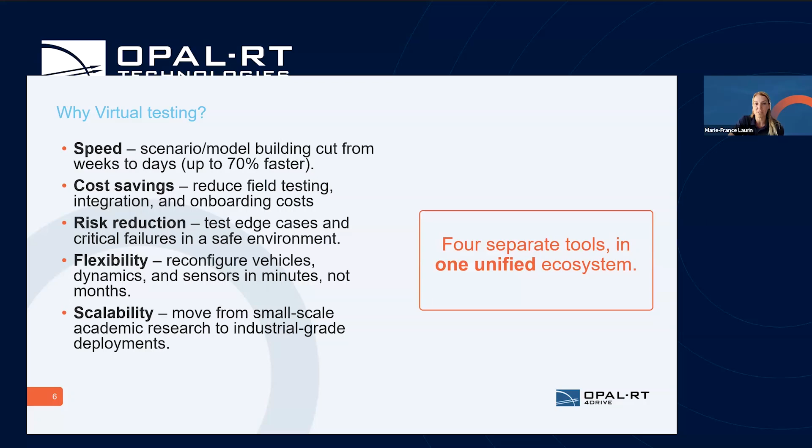4DV simulation is one unified ecosystem split into different tools that you can combine or select specific elements from. Just wanted to say, if you have any questions while we are presenting, please put the question in the Q&A. If we are able to answer them as we go, that would be great; if not, we'll keep them for the end and make sure to answer all your questions. So please do not hesitate, don't be shy—the best thing that happens is when we have conversation with you guys to make sure the presentation is relevant to what you're looking to accomplish.

The 4DV software suite is a combination of different tools, specialized in development and contextual sensor data. It defines your test environment for development of mobile robots, drones, autonomous vehicles, and AI. This is something very unique to 4DV simulation—the combination of all those different types of products—and the robotic angle of it is very important for us. What you do with the 4DV-SIM is simulate the sensor to generate the contextualized data that you'll need for your testing.

Then you facilitate the test and the reliability for the embedded system, lower cost for prototype, test and validation under close conditions of your use case. Especially if you think of defense, it's never really a testing environment that's easy to find. It's usually remote or really secluded area.

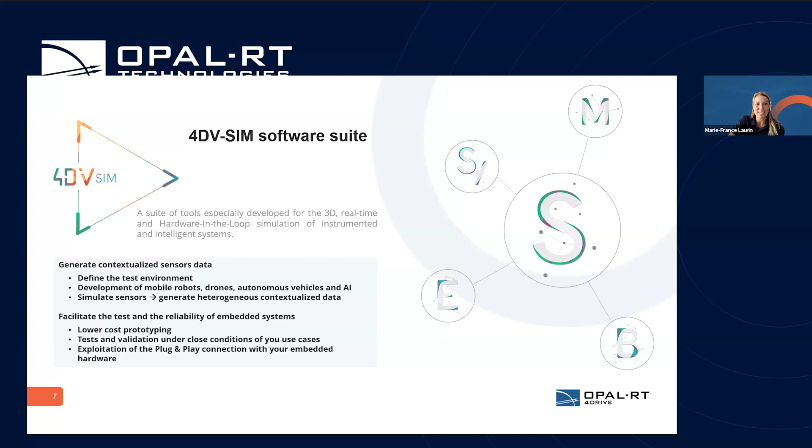So the real-time and hardware-in-the-loop 3D simulation testbed - what we do is define the context. So define your context, use the library 3D environment, pedestrian, vehicle, all the weather disturbance, the 3D objects that you would like to put into the simulation with your 3D environment, and then all the robots or the drones or the vehicle that you have.

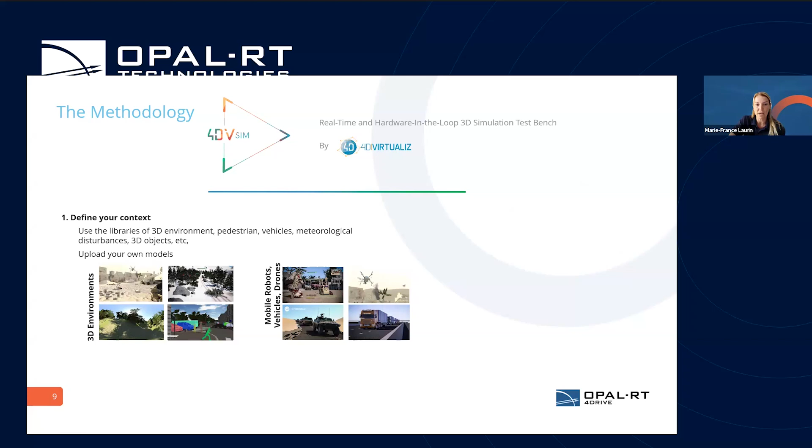Then you have the instrument with the same sensor, so generate or emulate from real sensor, the same mode of communication, so the communication protocol as with the real system. So the visual and physical sensors are added into the simulation. Then you have the interface with the tool, so you can do co-simulation or just simulation with the 4DV and analyze all the tools that you have.

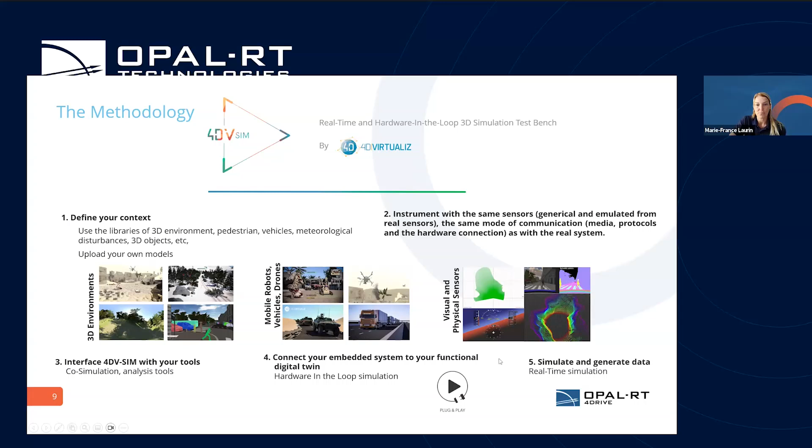So generate the functional simulation to quickly provide data in use cases which are difficult to access, dangerous. It's really something important when it comes down to the defense environment. You'll rarely have an environment where it's smooth road or perfect condition to have your autonomous vehicle running. That's why having the opportunity to create environments more similar to the situation that you'll have your mission, or that you have your mission command and your deployment done, is good to do with the simulation.

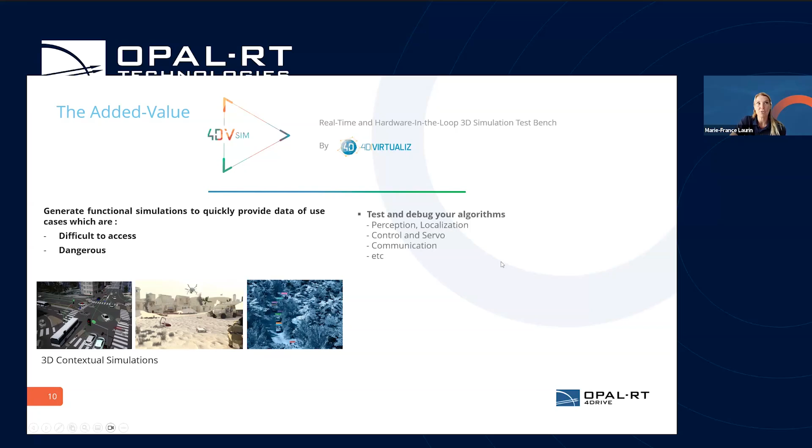And then test and debug your algorithm, all the perception, localization, control, communication protocol - what happens if some communication falls through because of the environment of the defense project.

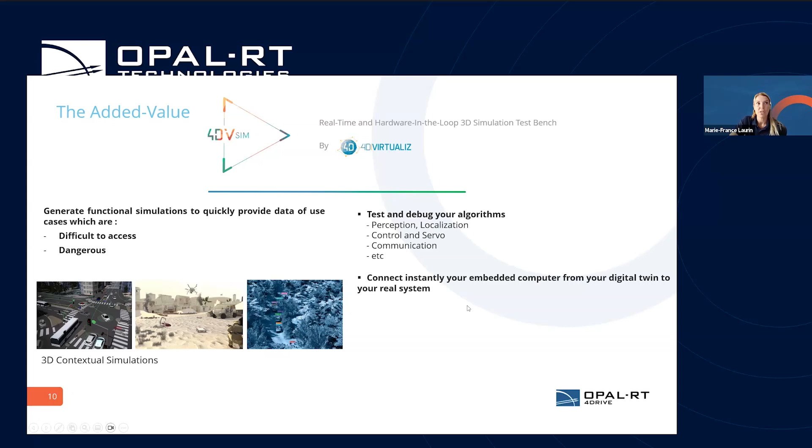Connect instantly your embedded computer from your digital twin to your real system. Improve the reliability of your algorithm with the automated tests that we can do, and then generate automatically a database and annotate images for the learning stage that you can use for your AI, and then develop, test and improve your user interface and the functional use of your control.

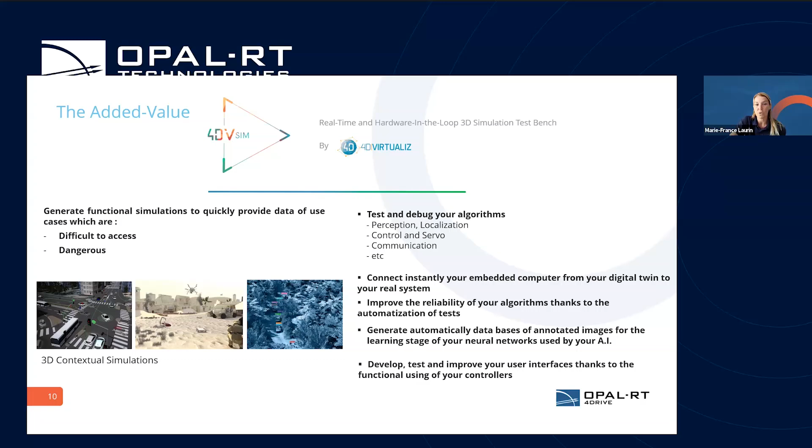It's also a good way with the simulation to make sure that the troops, or that the mission that you have, is well aware of how the vehicle is working, how it's interacting, and what to do in those situations.

So those are the different suites that we have into the 4DV-SIM software. I'll let Valentin go a little bit deeper into all of them, just to give you more information on all of those elements. Valentin?

Yes, perfect. Thank you, Marie-France. So as Marie-France explained, there's a whole process into creating a simulation. Now let's look at the different software components that compose this software suite, the suite of tools that is 4DV-SIM.

Let's start with the 4DV simulator there in the center. It is the piece of software that takes a simulation - let's call it a scenario - and the scenario contains all the sensor models, your systems, and the interfaces between the sensor data and your controllers in the loop. So that's what the simulator does - it runs the scenario and generates the data, communicates. But how do we create a scenario?

Well, we use one of the tools, the 4DV editor that you see, to create scenarios. So what is a scenario? It's a collection of different visual elements - 3D models of environments, of your own systems or of systems from our library, instrumented with the sensors placed around the vehicles as you'd like. One sensor, ten sensors, it will depend - it will affect the performance as well, but it's up to you to define those things using the editor.

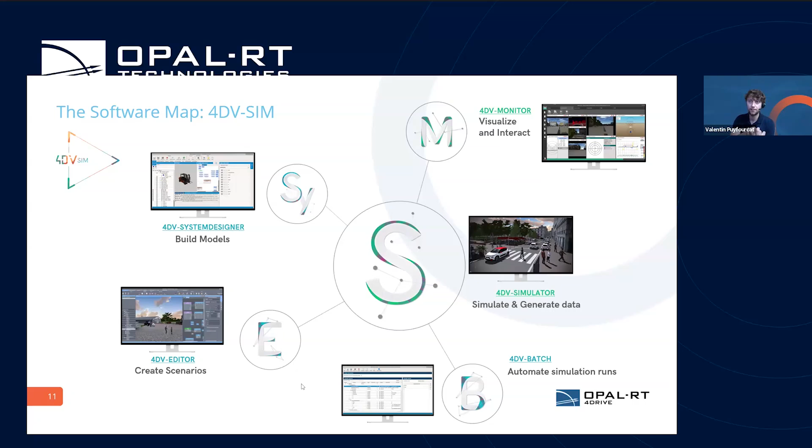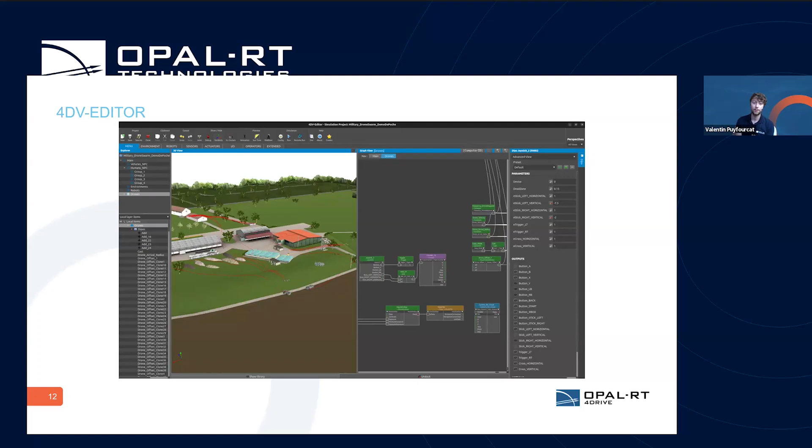I believe we have a couple more slides to give you an idea of what the GUI looks like, the graphical user interface. Here's the editor. It's a graphical user interface where we pick and choose from our library, either 4DV's library or your own custom library. On the left side, a 3D view of the elements to place them simply and quickly. On the right hand side, you have what we call the graph view, which is where we perform the different connections between, let's say, sensors and communication interfaces, or communication interfaces to your systems for information like speed and control commands. So this is just a quick overview.

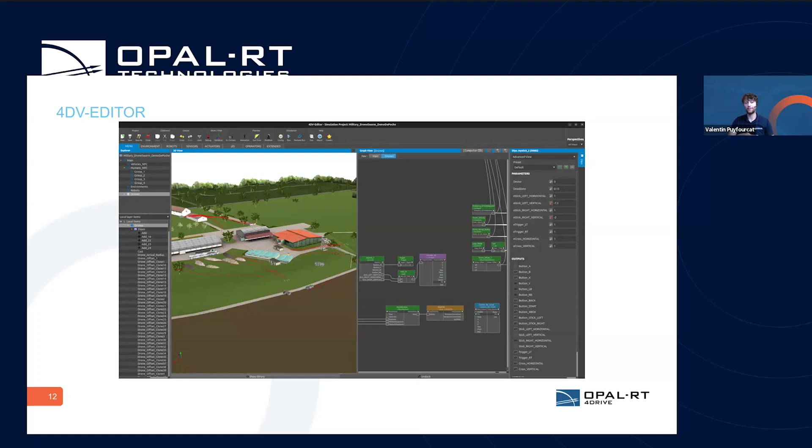Next slide, we have the 4DV System Designer. This slide was to show you how large of an environment we can introduce. This is about a 5 by 10 kilometer environment. It all depends on the number of vertices in your models, but we can simulate large environments like this to perform long-lasting missions going through different terrains, over mountains, etc.

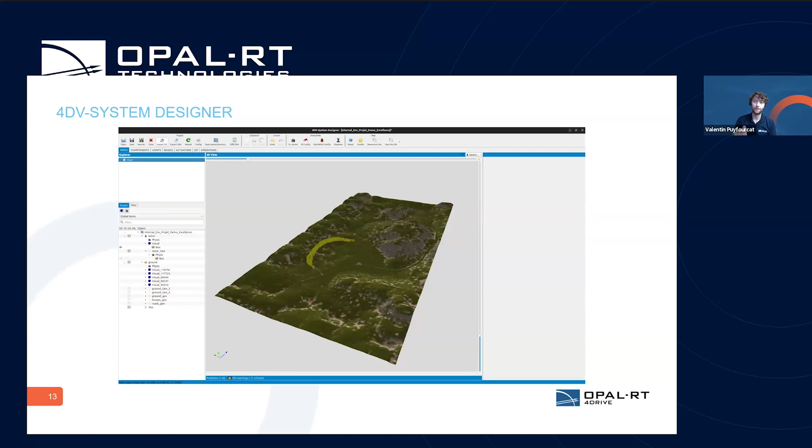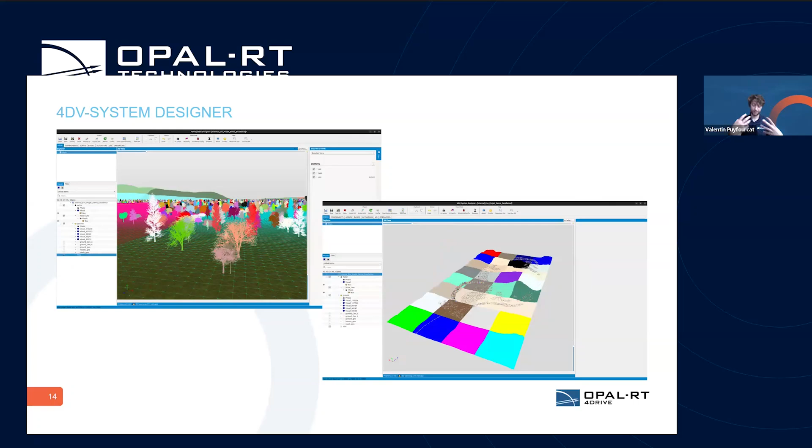If we go to the next slide, we get a closer look at the definition. Here we see more of the physics side of it, the mesh definition of the environment, the ground, and some of the trees populated in that environment. So 4DV System Designer is used to bring in these 3D models and give them their physical properties so that you get a realistic simulation.

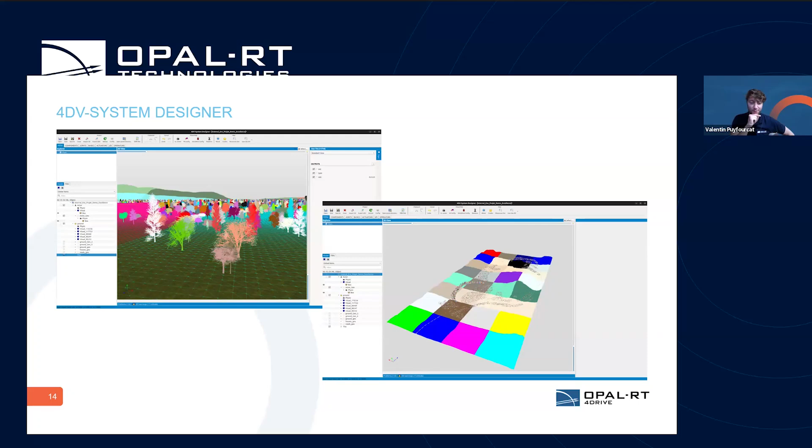I believe I've got one more slide on the 4DV Monitor to give you an idea of the different cameras, the different visual elements that exist to visualize the sensor data. We see some LiDAR point cloud, some cameras, and some elements for orientation of likely a drone on the top right corner. So all of these elements are part of the software suite.

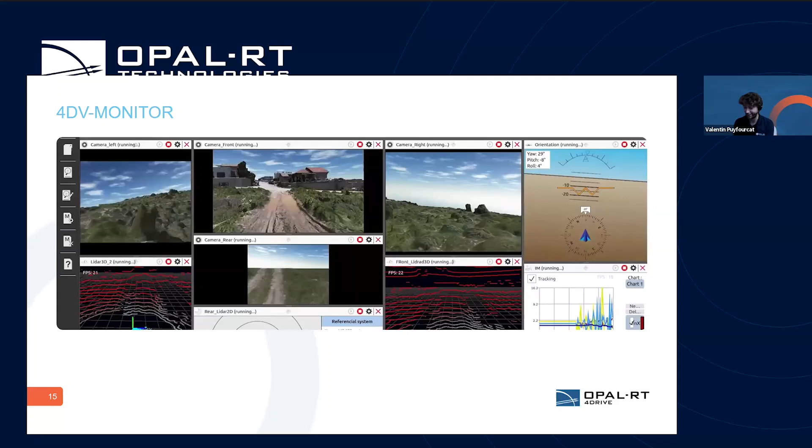Now for the next section, we're going to explain how 4DV can help you in your defense simulation, with supporting evidence, with supporting videos, on what has been accomplished.

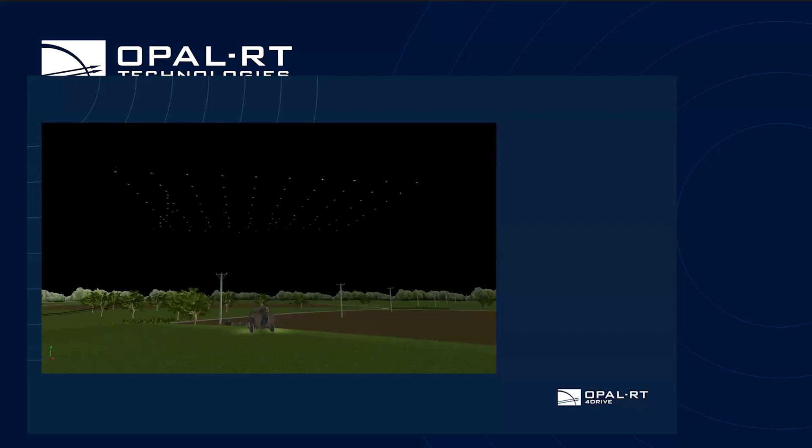Welcome to this presentation on 4DV-SIM. 4DV-SIM is a multi-domain simulation platform designed for autonomous ground and aerial robots operating in complex, realistic environments. It is neither a true training program nor a high-level wargaming tool, though it integrates with both. So here's what makes it different. First, the multi-domain and multi-agent simulation. 4DV-SIM simulates ground vehicles, with wheels or tracks, unmanned aerial vehicles, and swarms of them simultaneously. A single scenario can run up to 100 drones with full flight dynamics, all while managing ground convoy operations in the same environment in real time.

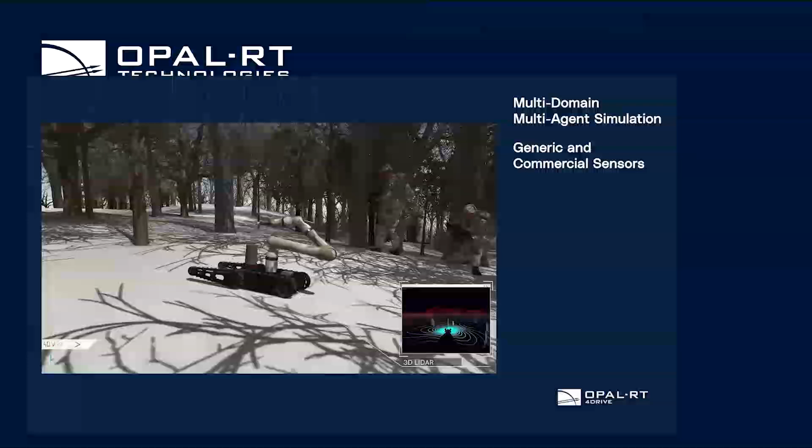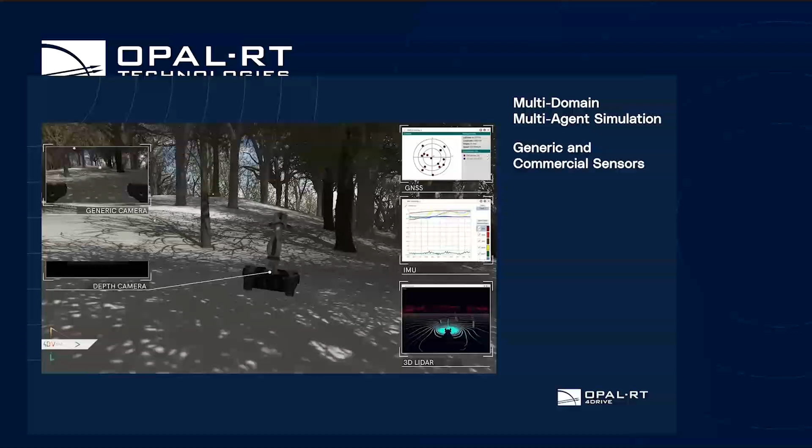Generic and commercial sensors. Every sensor in 4DV-SIM is configurable. You can use generic sensors or pre-configured commercial sensors that replicate real-world behavior, including their exact communication protocols and data structures. For example, a LiDAR doesn't just return perfect point clouds, it returns what a real LiDAR returns, coherent in time, with no drift.

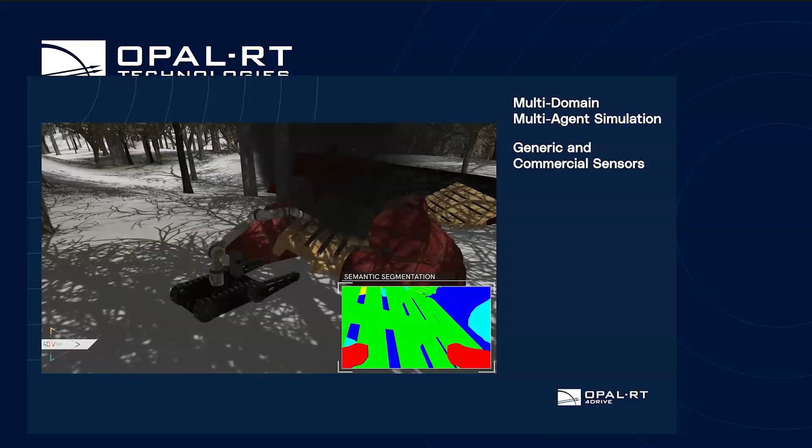And a GNSS sensor doesn't give perfect coordinates. It includes noise, latency, obstructions with buildings and trees, and availability of the actual satellites in an accurate georeferenced environment.

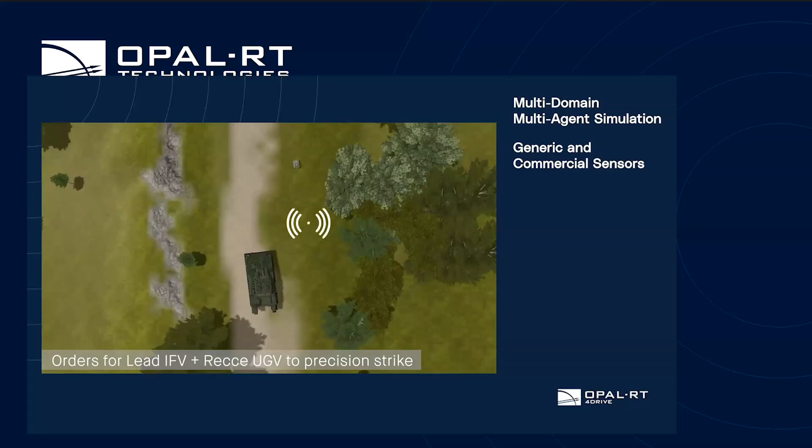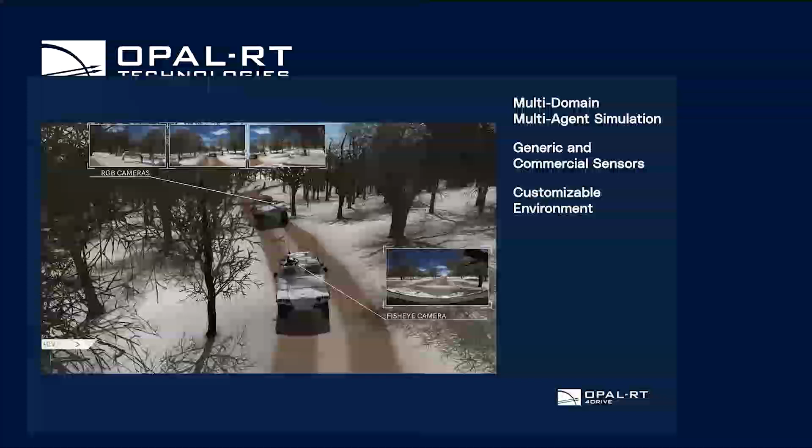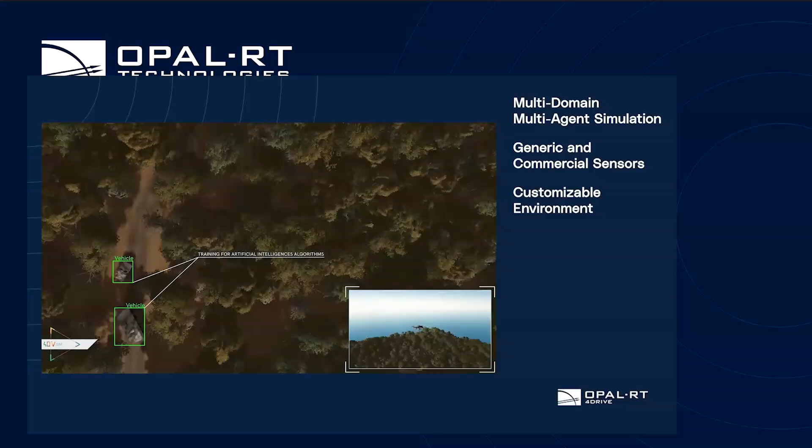Rough terrain, friction coefficients, material properties—all of these things are configurable and importable in 4DV-SIM. You can build a scenario from real-world 3D models, import it as meshes, adjust surface properties, static and dynamic frictions, how light interacts with the material, and other visual elements, and populate it with obstacles, different vehicles, and contextual objects. Your simulation environment can reflect a desert, a mountain pass, urban terrains, any environment really where your autonomous systems will operate.

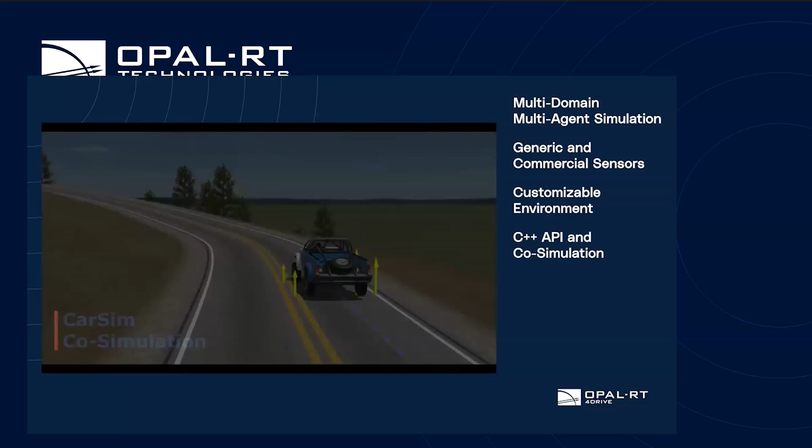The C++ API and co-simulation. For teams that need to extend the simulation platform, 4DSim exposes a C++ API where you can write custom controllers, integrate third-party libraries, or perform any simulation logic.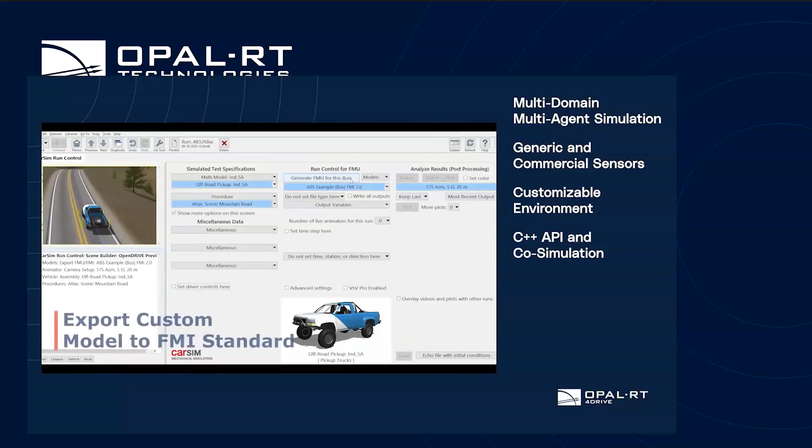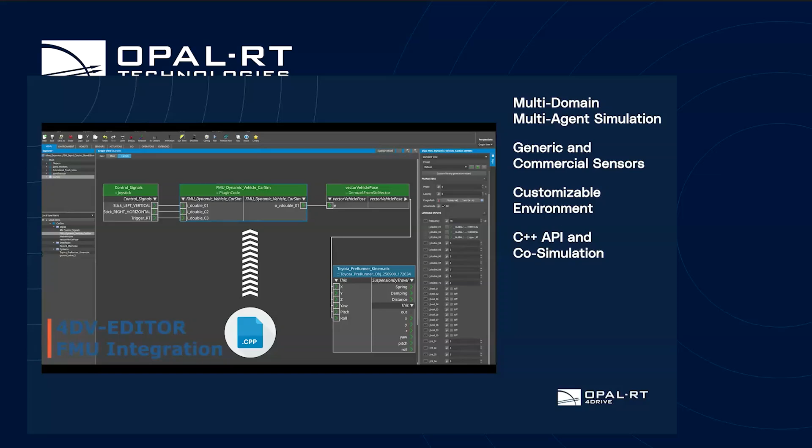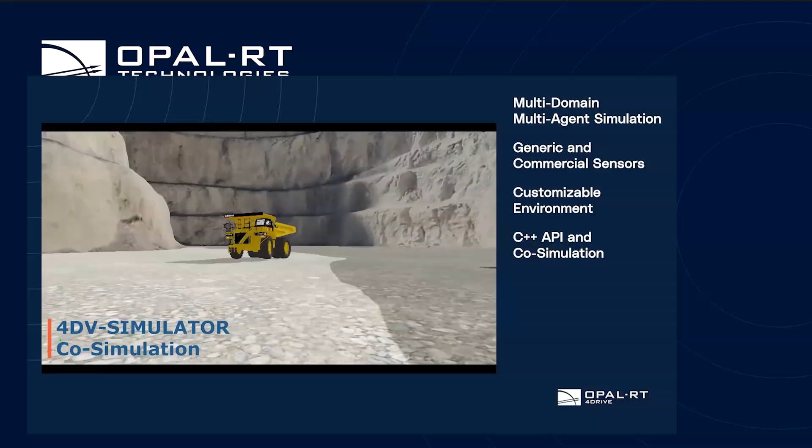This code executes at the simulator's time step or the frequency you specify, so your code runs deterministically alongside the physics of the simulation. This is how you build custom autonomy layers without leaving the simulation environment, and it's great for exploring control strategies before or even after getting your hands on the real hardware.

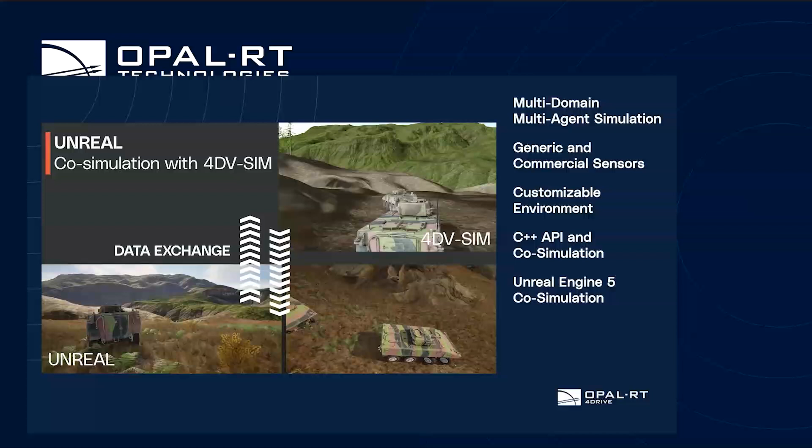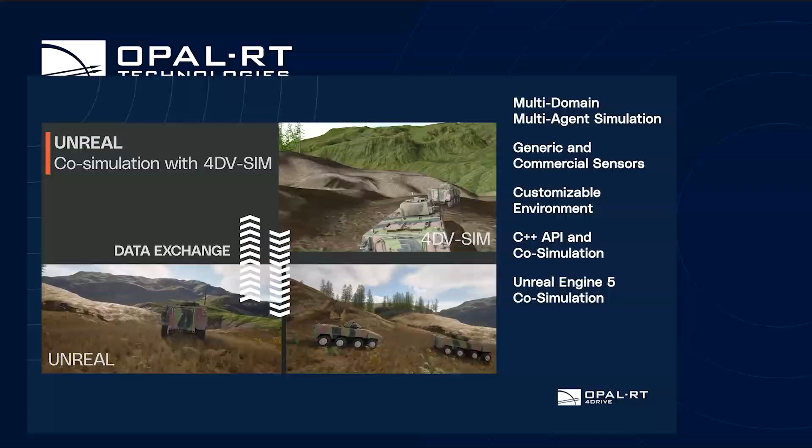Unreal Engine 5 co-simulation. 4DV-SIM co-simulates with Unreal Engine 5, the industry standard for high-fidelity visualization. Here's how it works: you build your scenario in 4DV System Designer—the vehicles, the sensors, the terrain, the physics—all configured. Then, through a resource transfer between System Designer and Unreal Engine, the environment syncs.

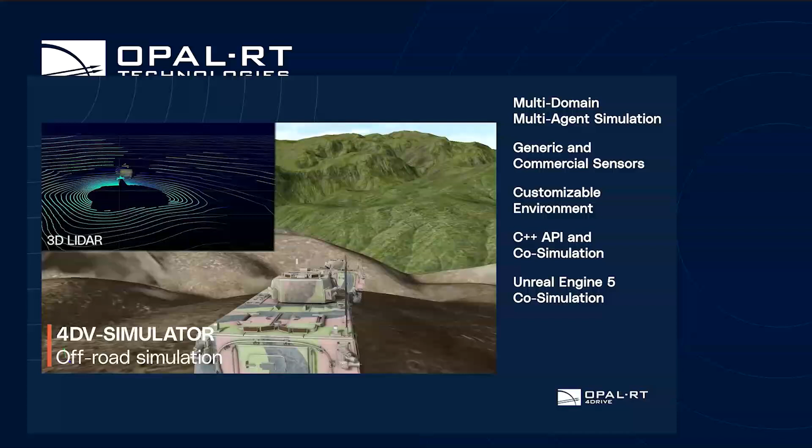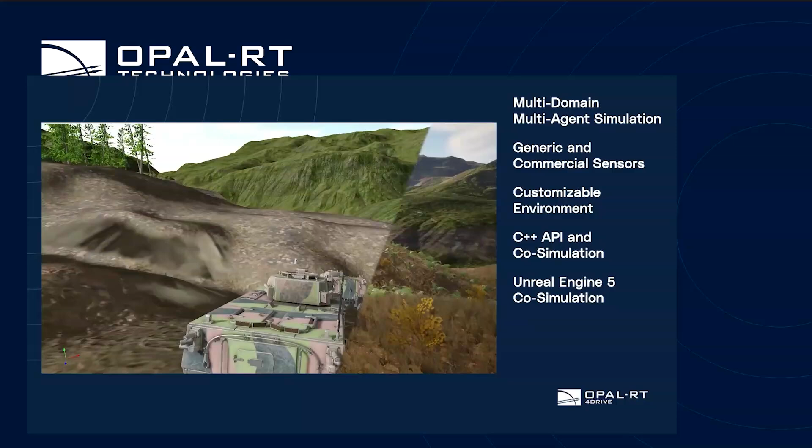Your vehicles, terrains, and object placements carry over seamlessly, minimizing rework. If you need to optimize certain things like the level of detail, refine materials, or add custom proprietary visual effects to Unreal Engine, you can do that directly in the Unreal Engine editor. But the heavy lifting is already done.

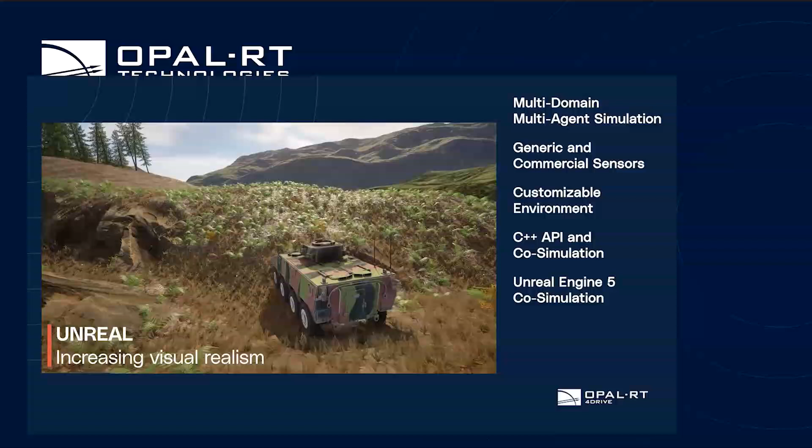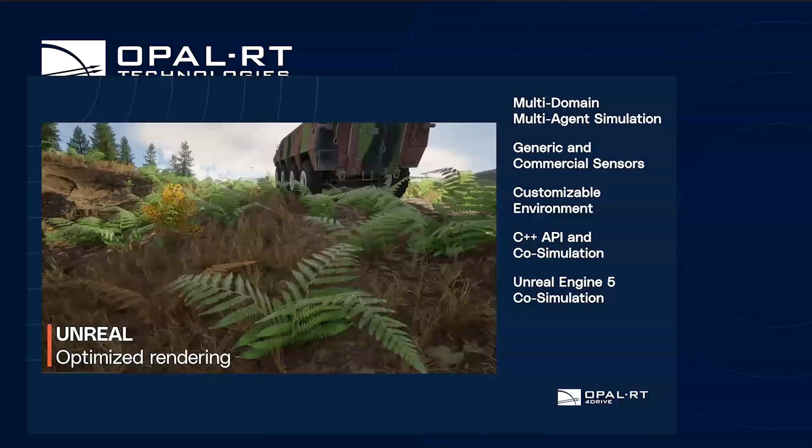That way, your simulation runs the physics in 4DV-SIM while rendering in Unreal's graphics engine. You get photorealistic visuals for your software stack, your stakeholder demos, operator training, etc., without sacrificing the sensor realism and the multi-agent physics that make the simulation so valuable.

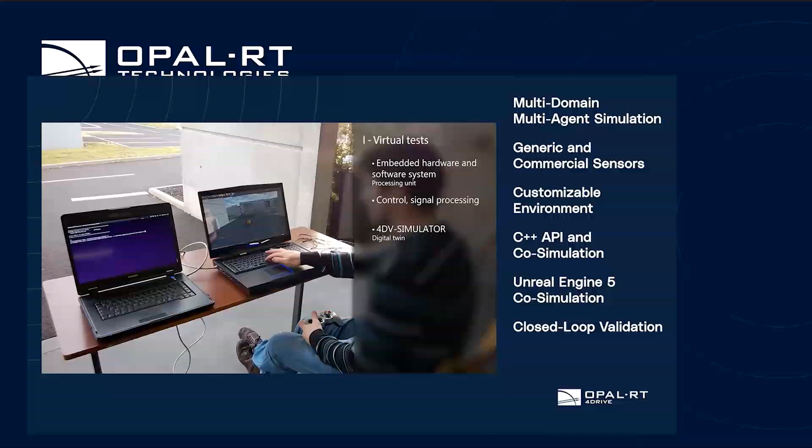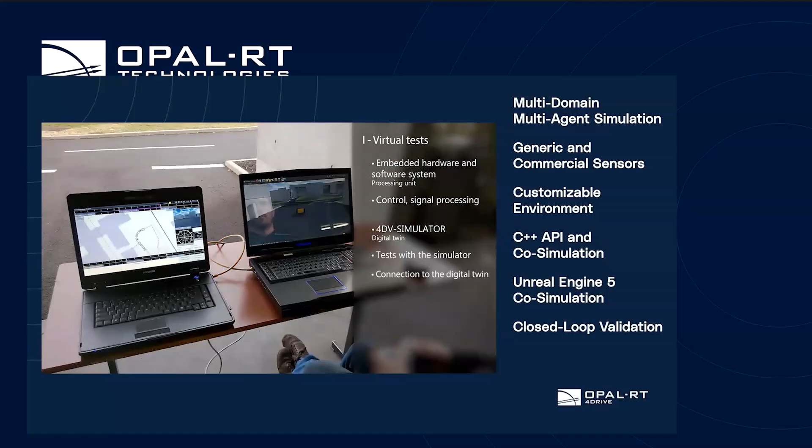Closed loop validation. So here's the critical part: 4DV-SIM doesn't just simulate vehicles and sensors in isolation, it closes the simulation loop. Sensor data flows out of the simulator to your real autonomous controllers, whether they're running in software in the loop or in hardware in the loop.

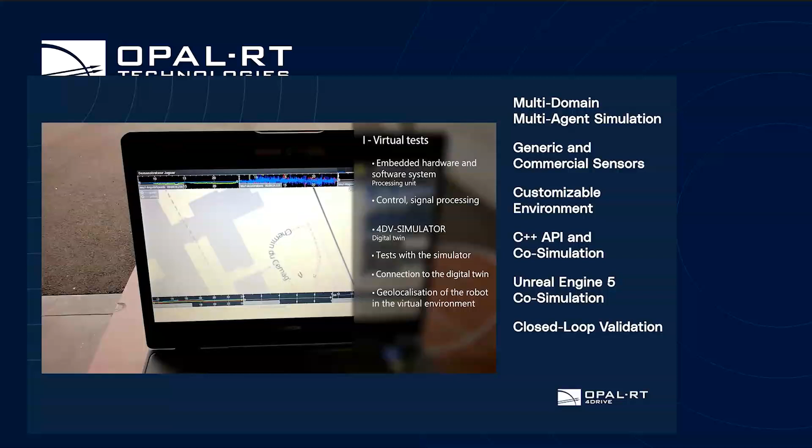Those controllers send back control signals—speed, steering, flight commands, etc. The simulator ingests those commands and updates the vehicle state in the physics engine, keeping the data coherent, even in the case of slower than real-time simulation.

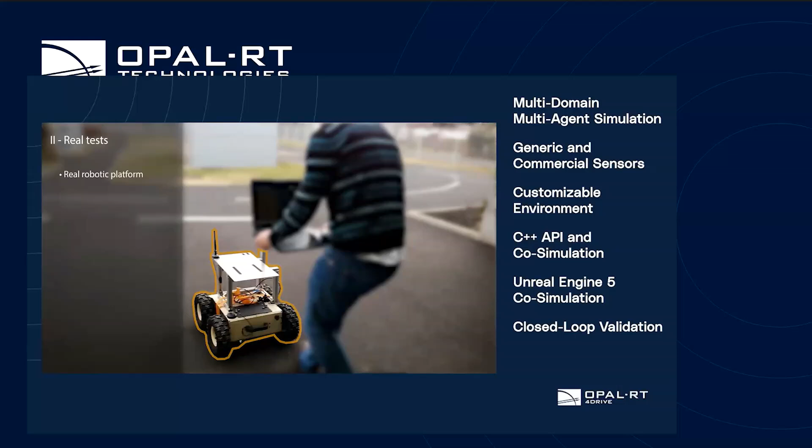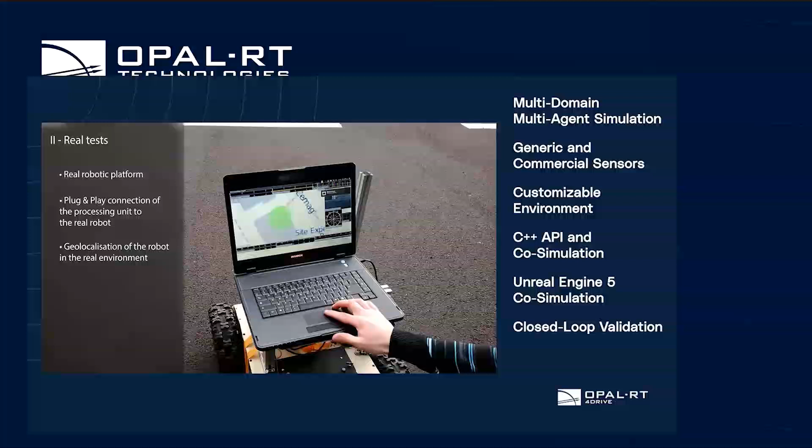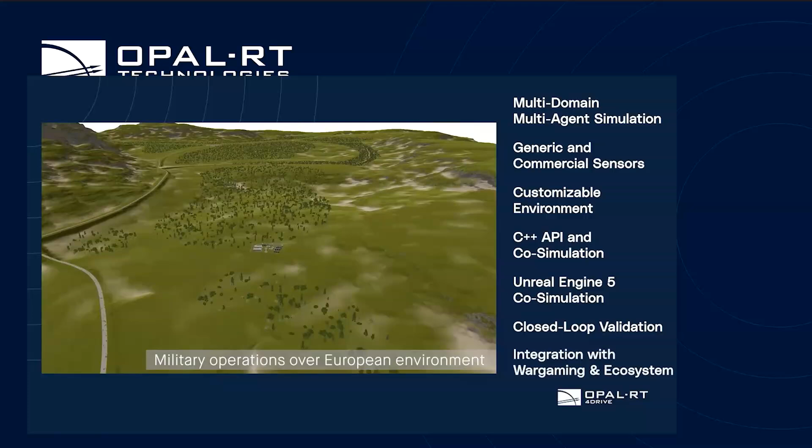That tight feedback loop is what lets you validate that your actual controller code actually works in a complex dynamic environment in software in the loop, and even that the actual hardware is working properly in the case of hardware in the loop simulation. Finally, integration with wargaming and other ecosystems.

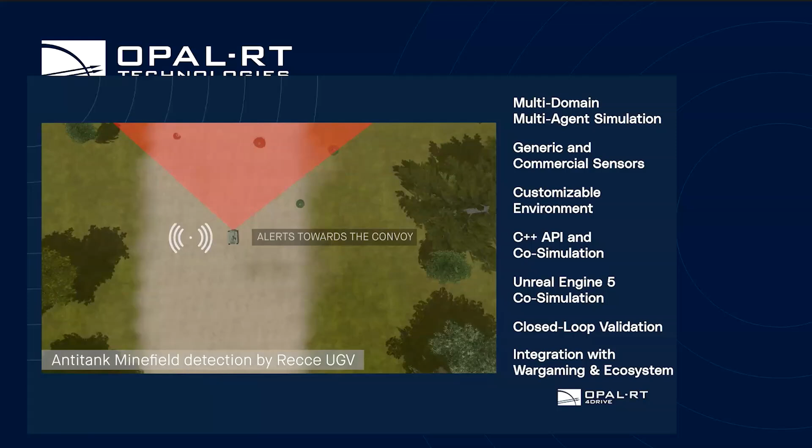While 4DRIVE handles the physics and the behavior of individual vehicles and multi-agent coordination, it can integrate with higher-level systems we call C2 systems that handle strategy and operational planning.

So a high-level wargaming or C2 system might plan to route a 10-vehicle convoy through a mountain pass under GPS denial, with mixed vendor platforms, let's say.

Now, 4DRIVE-SIM gives you this answer, right? Can those vehicles actually execute that plan? Will they collide? Can the LiDAR on the lead vehicle detect obstacles ahead? What happens when the GPS degrades? Do the controllers maintain cohesion?

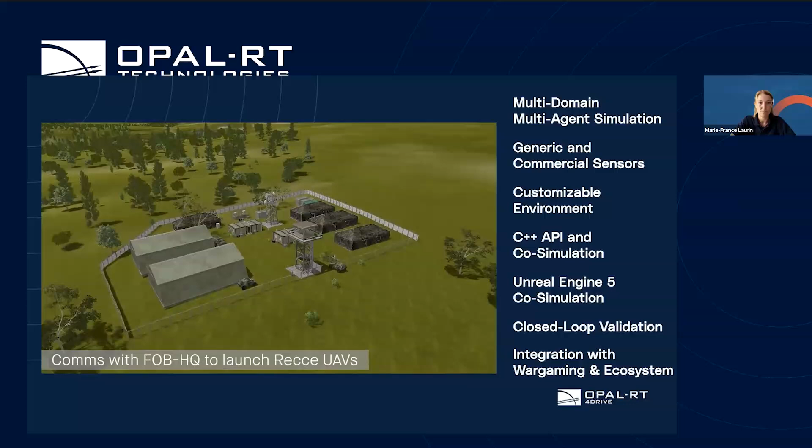4DRIVE-SIM lets you test whether a C2 decision actually works in a realistic scenario with those sensors and the control systems plugged in.

That's it for the demonstration. Thank you.